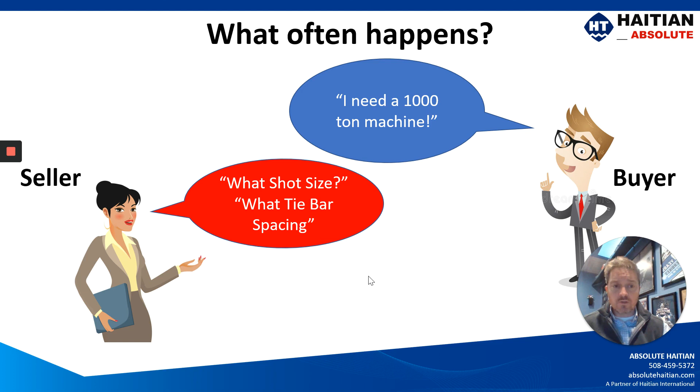Part of our daily routine is to quote machines, and what often happens is a buyer will say to us, 'I need a 1,000-ton machine.' The seller replies, 'Well, what shot size? What tie bar spacing will you need?' And the buyer might respond, 'I just need a 1,000-ton quote.'

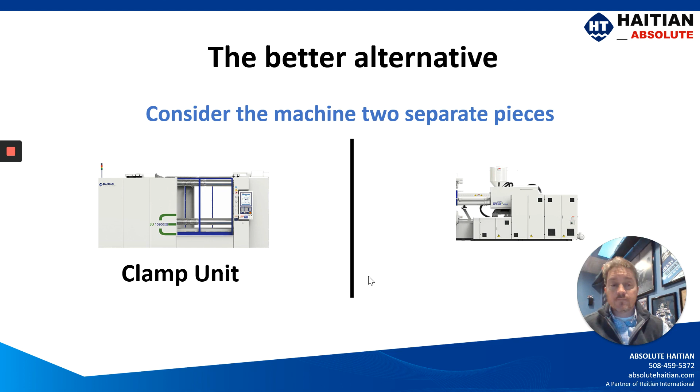The better alternative to this is to consider the machine as two different pieces, the clamp unit and the injection unit. So let's start with the clamp unit.

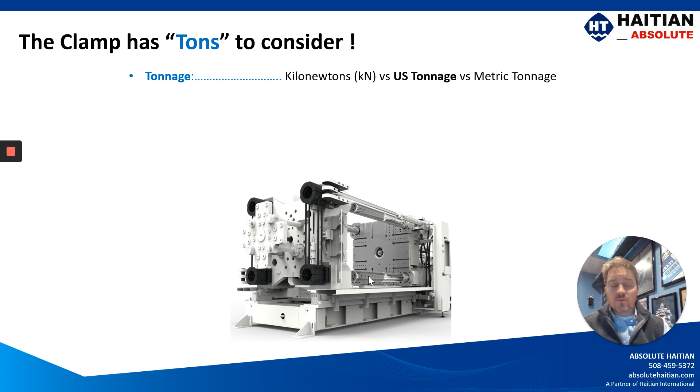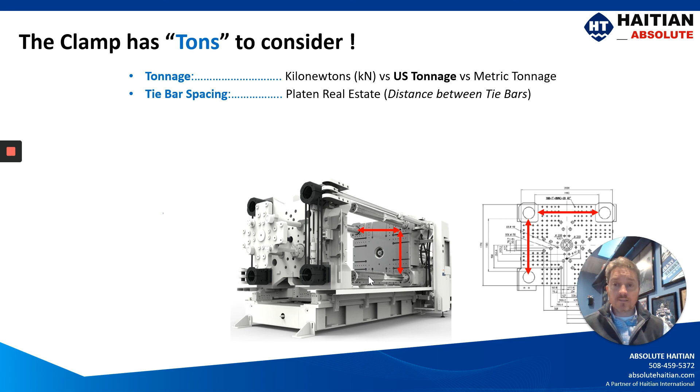The clamp has tons to consider, and yes, that pun was intended. Tonnage of the machine is given in kilonewtons, US ton, and metric ton. Here in the United States, we more often than not would use US tonnage. But another large driving factor is tie bar spacing, as well as the minimum mold height, the maximum mold height, the stroke, and the daylight.

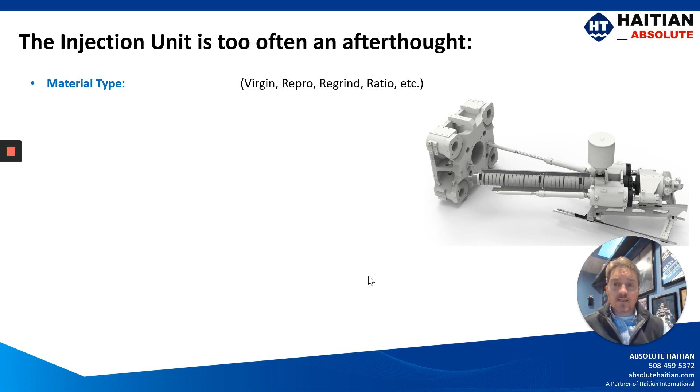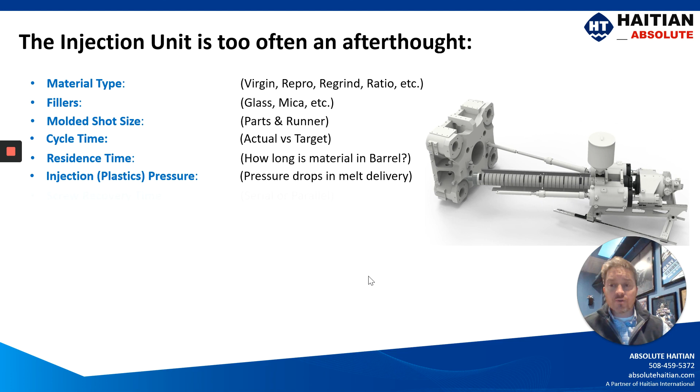But let's not forget about the injection unit. It's often an afterthought when it comes to quoting machines. We need to be considering things like the material type, the fillers of the material, the molded shot size, the cycle time, the residence time, the injection plastic pressure, and screw recovery time, but also the screw geometry.

Unless otherwise specified, most machine manufacturers are going to quote what's called a GP screw. In many applications, though, what we should be using is a mixing screw, and sometimes a barrier mixing screw.

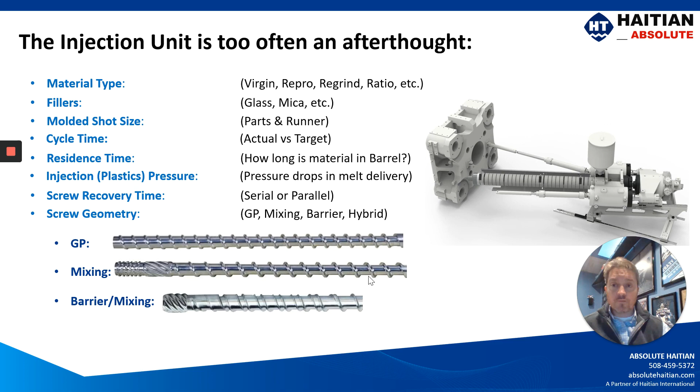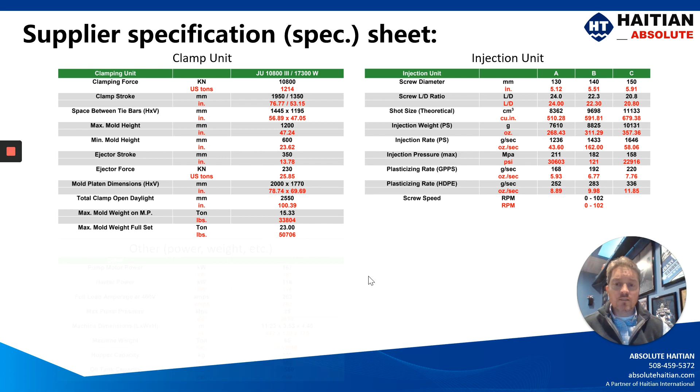Every machine supplier has available for you a machine specification sheet, and on that sheet it will clarify the clamp dimensions, the injection dimensions, and other important aspects of the machine like the full load amps and the size of the machine dimensions for the real estate the machine will require on your floor.

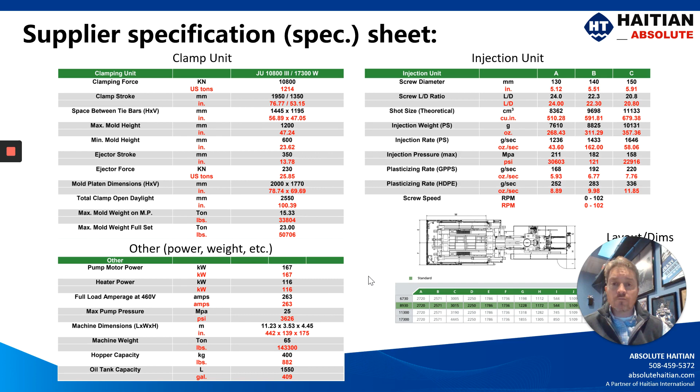So in up-and-coming videos, we're going to go through a step-by-step process on putting together a proper machine specification, going through things like how to size a clamp, how to size the injection unit, what materials matter, different screw geometries, fast cycle and parallel motions, auxiliary equipment, and last but not least, automating your machine.